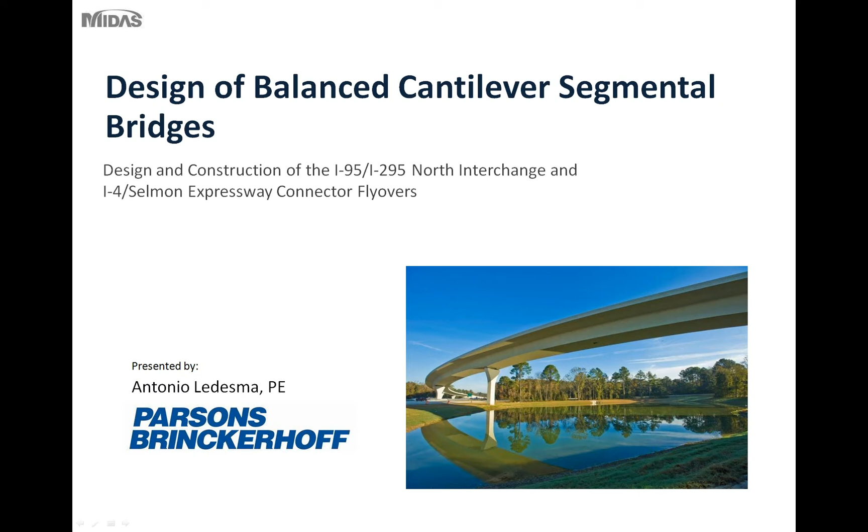Good afternoon, everybody. I hope you can hear me. Thank you for joining us for this presentation on the basic design of balanced cantilever bridges. As Puya mentioned, I'll discuss two projects that I was a design engineer on, and hopefully you'll get a basic understanding of precast balanced cantilever design.

The presentation will discuss some learning objectives, basic balanced cantilever construction, and then I'll go into the two case studies: the I-4 Lee Roy Selmon connector in Tampa, and the I-95, I-295 North Interchange in Jacksonville, Florida. If anybody writes in a question, I'll attempt to answer them.

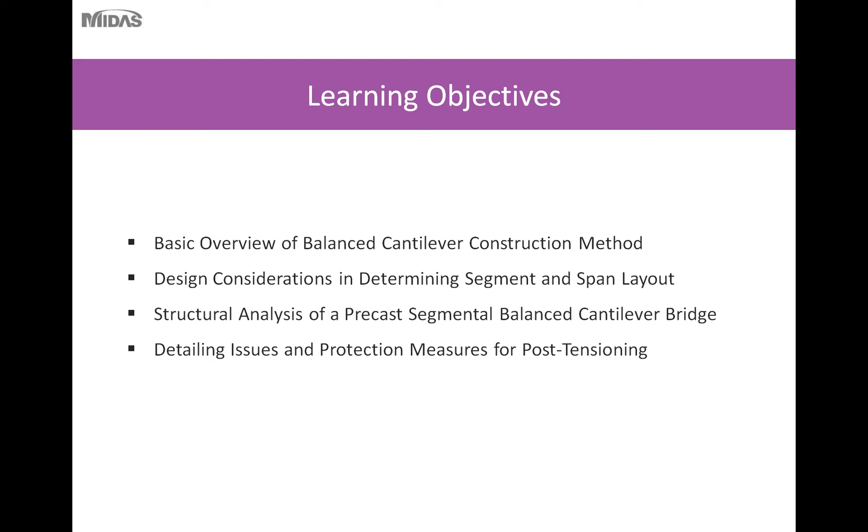So the learning objectives today would be a basic overview of balanced cantilever construction, the balanced cantilever construction method, some basic design considerations in determining the segment layout and span layout of the bridge, a general discussion on the structural analysis of a precast segmental balanced cantilever bridge, and some detailing issues and protection measures for post-tensioning tendons used in Florida.

For balanced cantilever construction, precast balanced cantilever is basically a construction method involving progressively erecting segments on alternating sides of the pier segment. You erect one segment on one side, then transfer to erect another segment on the other side, progressively cantilevering the segments out on alternating sides.

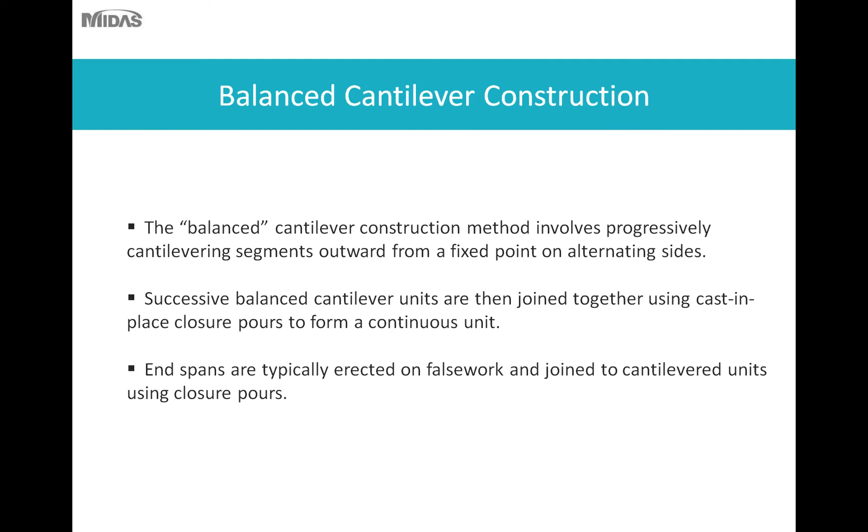Successive balanced cantilever units are then joined together using a cast-in-place closure pour or stitch pour to form continuous units. The end spans, since they don't have a way of balancing on the other side, unless special considerations are made, are generally erected and supported on falsework.

Some advantages of balanced cantilever construction include the ability to construct over traffic, short lead time compared to acquiring and fabricating steel elements, and the use of local labor and materials, since precast segments are usually cast on site or very close by. Local materials and labor are typically used for casting segments, as opposed to shipping in large steel girders or tubs. Balanced cantilever construction can also be erected using trusses to eliminate ground-based, crane-based erection.

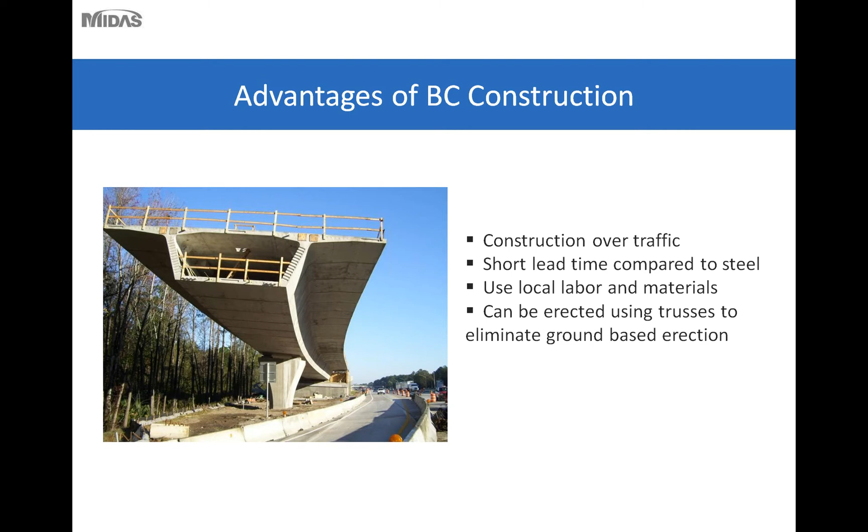So the first project I'll discuss is the I-4 Selmon Expressway interchange. I'll discuss one of the ramps, Ramp C, go through the balanced cantilever construction sequence, and then talk about some unique features of this bridge.

The project is located in Tampa. The horizontal road at the top of the picture is Interstate 4, connecting Tampa to Orlando. The expressway along the bottom is the Selmon Expressway. The DOT proposed to connect these two major thoroughfares with what they call the I-4 Selmon Expressway connector. This project was so large that they split it up into two sections: the north section was designed by Parsons Brinckerhoff, and the south side was designed by a couple of other firms.

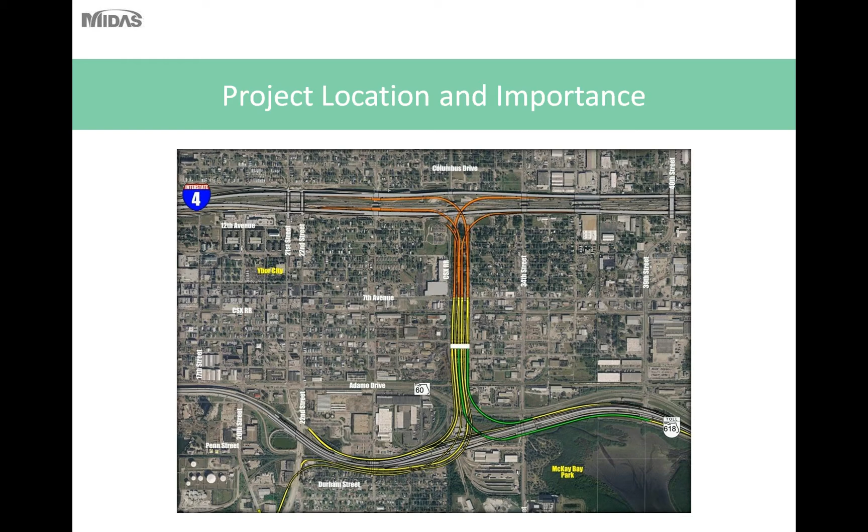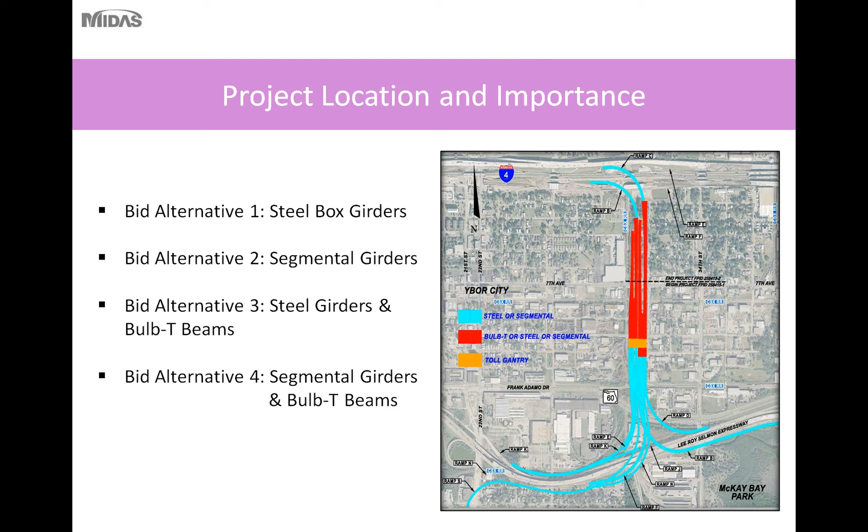So for this project, due to the scale and to promote the most aggressive bidding, 4 alternates were let for the project. Bid alternate 1 consisted of using all steel box girders. Alternate 2 consisted of an all segmental approach with a mix of balanced cantilever and span-by-span construction. Bid alternate 3 included steel girders for the flyovers, and the red section shown in the picture is called the viaduct. The viaduct would be constructed out of bulb T-beams, and the 4th alternative was using segmental bridges for the flyovers and bulb teeth for the viaduct.

So the chosen bid package was a segmental with the Florida bulb T's for the viaduct.

So the bridge I'll be talking about today is the north interchange with the connection to Interstate 4. There are 2 balanced cantilever flyover ramps at this location.

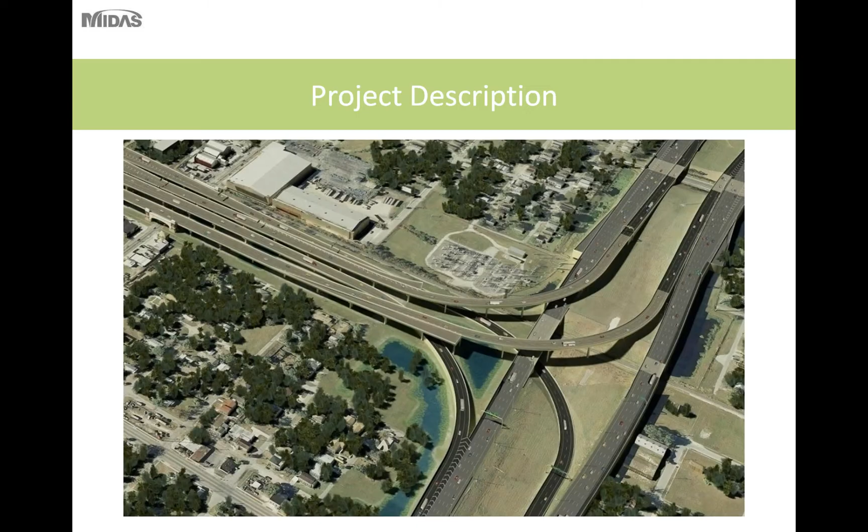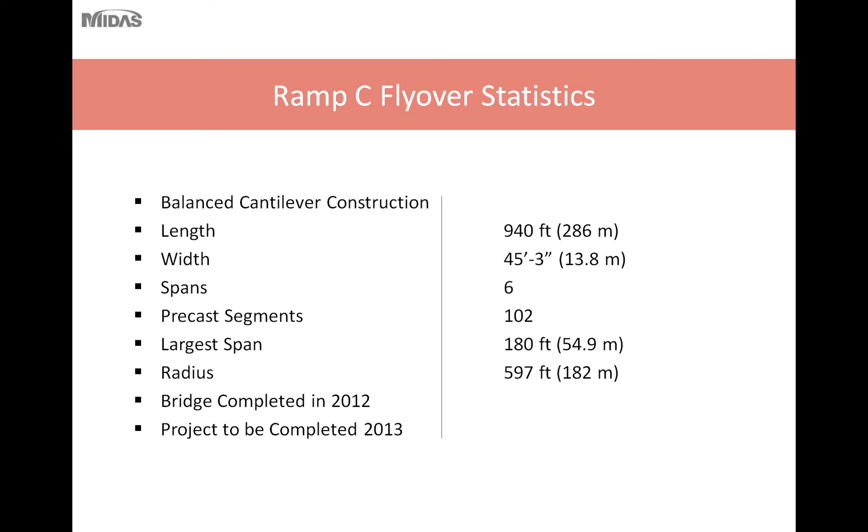Some of the ramp statistics: this bridge was constructed using precast balanced cantilever construction method. The length of the bridge was 940 feet with a width of 45 foot 3 inches to accommodate two travel lanes and shoulders, 6 spans comprised of 102 precast segments. The largest span was 180 feet, and the horizontal curvature of the bridge was approximately 600 feet. The bridge was completed in 2012, and the project overall should be completed roughly maybe summer of next year.

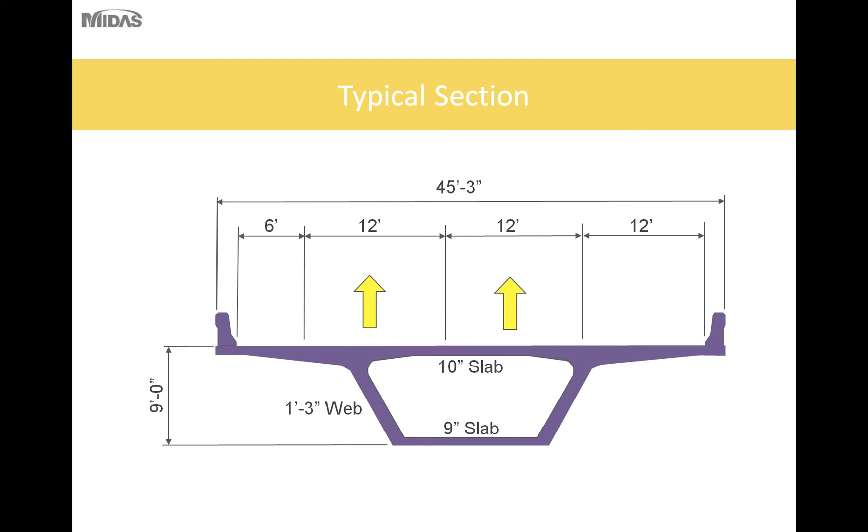Shown here is a typical section showing that the bridge carries 2 lanes of traffic and the shoulders. As you can see, the depth of the girder is 9 feet. The top slab is 10 inches and the bottom slab is 9 inches.

So the pier segments for this bridge are constant depth throughout. The height of the bridge was not increased near the piers, and this was to tie into an existing project, the Selmon Expressway, and keep the box proportions similar. The depth of the structure is 9 feet deep, and the span to depth ratio is 20 for this bridge.

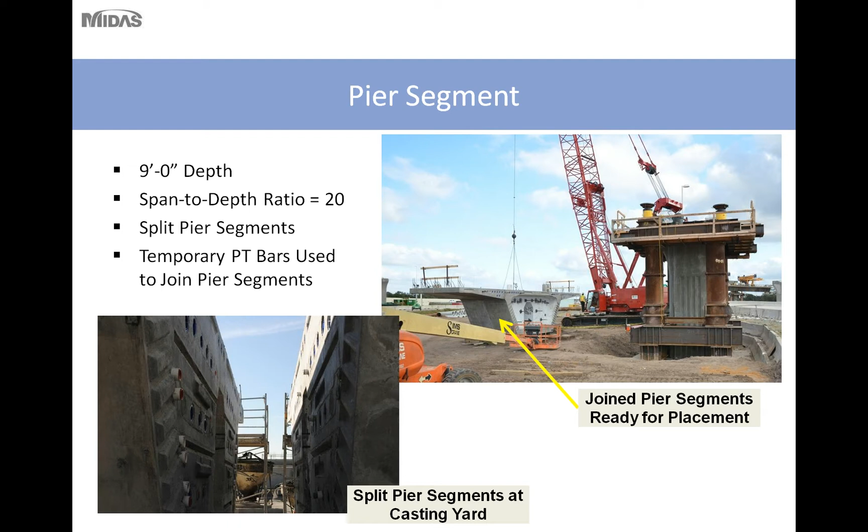The foundation is comprised of 36-inch drilled shafts. We try to use one typical size footing to increase efficiency and limit the number of foundation types. However, there was a special foundation at Pier C4, which we'll discuss in a little bit.

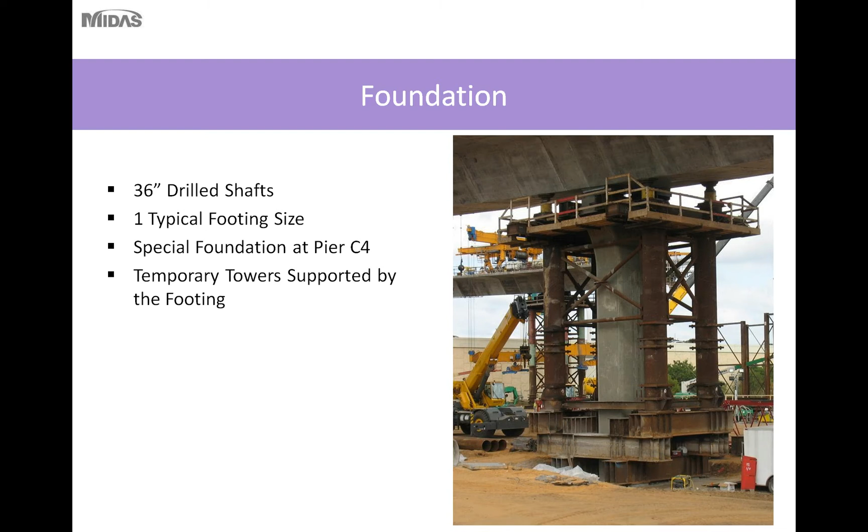So to erect the balanced cantilever construction, we typically use temporary towers supported on the footing. These towers can be supported off the footing on their own foundations, but typically it's easier to support them on the footing if your footing is designed to accommodate the overturning moments on the temporary towers. If not, these towers can be spread out further and supported on temporary footings of their own.

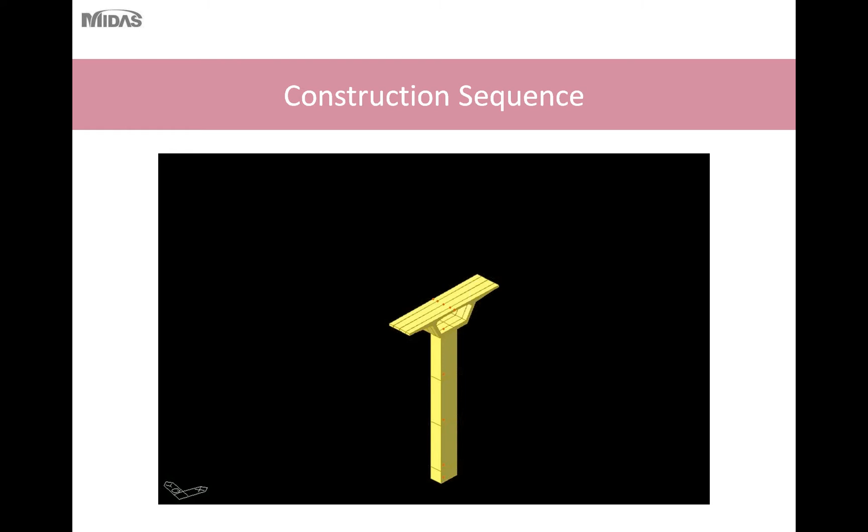So what I would show you here is the basic construction sequence for a balanced cantilever construction using the Midas software. Typically you would use a specialty software like Midas or others to simulate the stage construction of the bridge. Typical software packages don't allow you to have separate models or separate structures not joined together in the same model, so typically you need specialty software to allow unconnected structures and to take into account the time-dependent effects and loading history on the structure.

So here we would typically start by erecting the substructure, the columns, and then erect the pier segments. Successive precast segments are joined to the pier segment on alternating sides and connected using what we call cantilever tendons in the top slab. So as you progress outwards, you install new cantilever tendons of varying lengths.

During this unbalanced phase, what I've shown is two segments erected, but typically you would erect one at a time, join them using temporary erection PT bars, then join the other segment, and connect those two segments with the entire structure using a cantilever tendon.

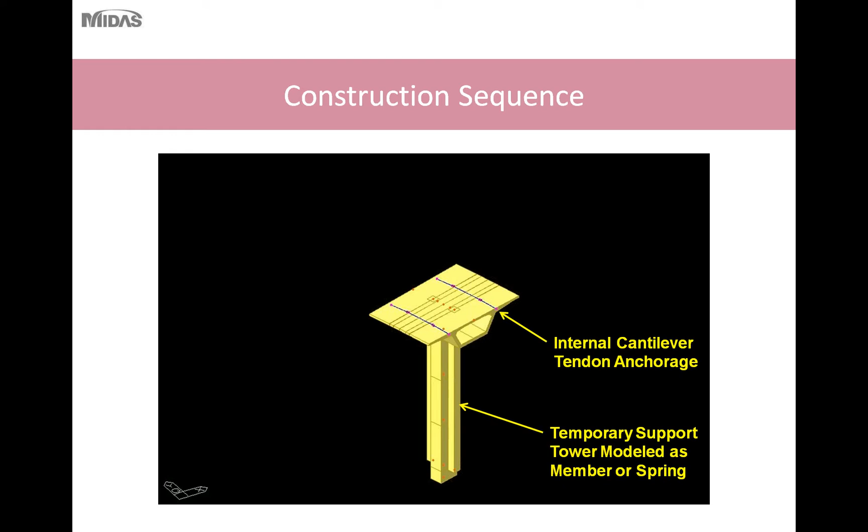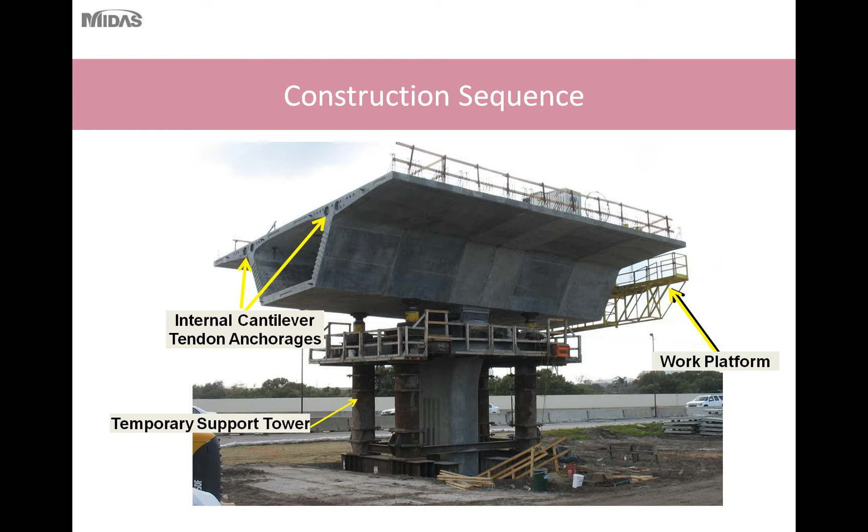The cantilever tendon is located in the top slab, and typically a work platform is installed at the end so that workers can access and stress the tendons during erection.

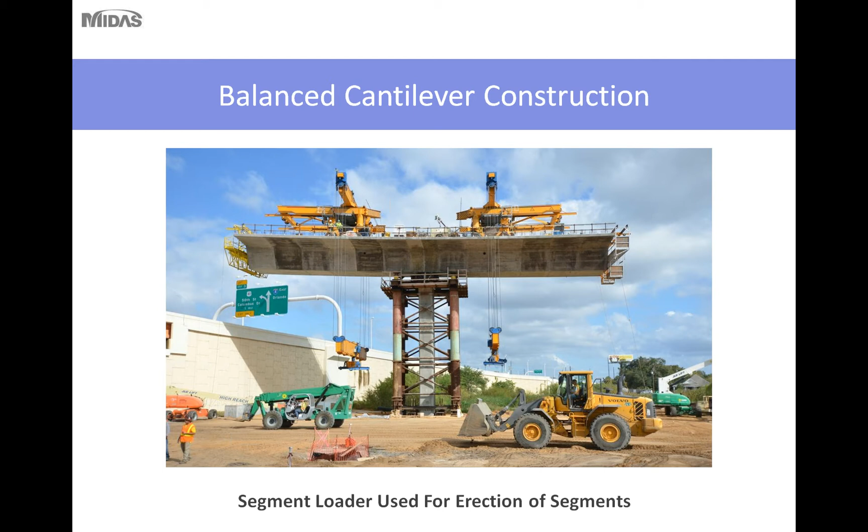This particular bridge, you can erect the segments numerous ways. The most common way is using ground-based cranes. However, for this project, a segment loader was used to erect the segments. The advantages of using a segment loader: if you have very tall piers or you're over terrain where locating ground-based cranes isn't feasible, the use of a segment loader is very beneficial in the sense that you can deliver the segments to the site near the piers in one location. The segment loader can drop down, pick it up, and move it out to the cantilever, which may not be possible using other construction methods.

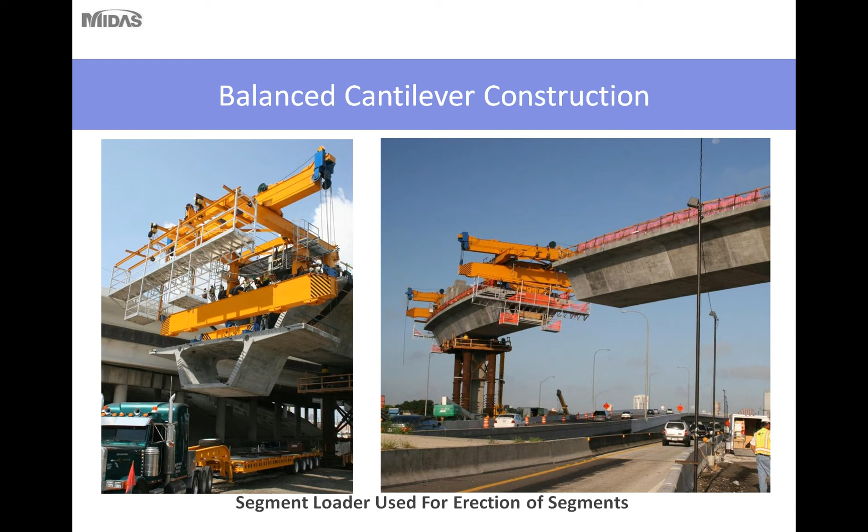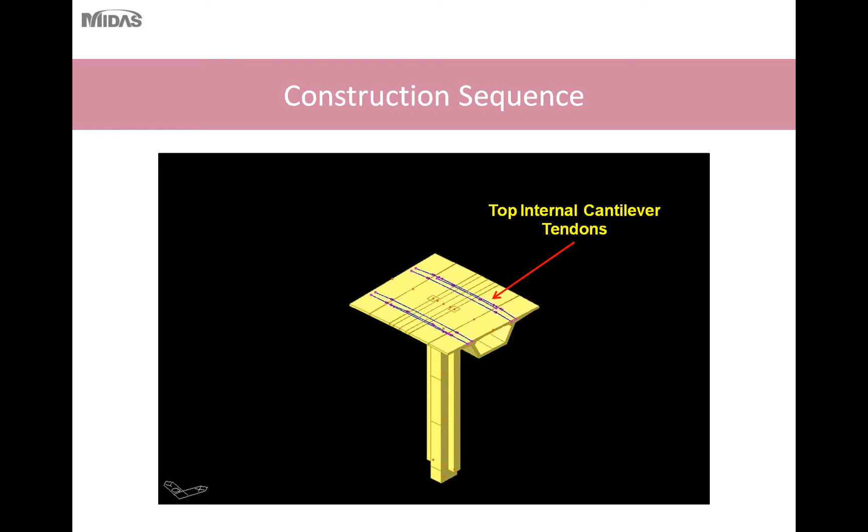The process will continue where you erect segments on alternating sides, and you continue erecting until you finish the balance cantilever unit.

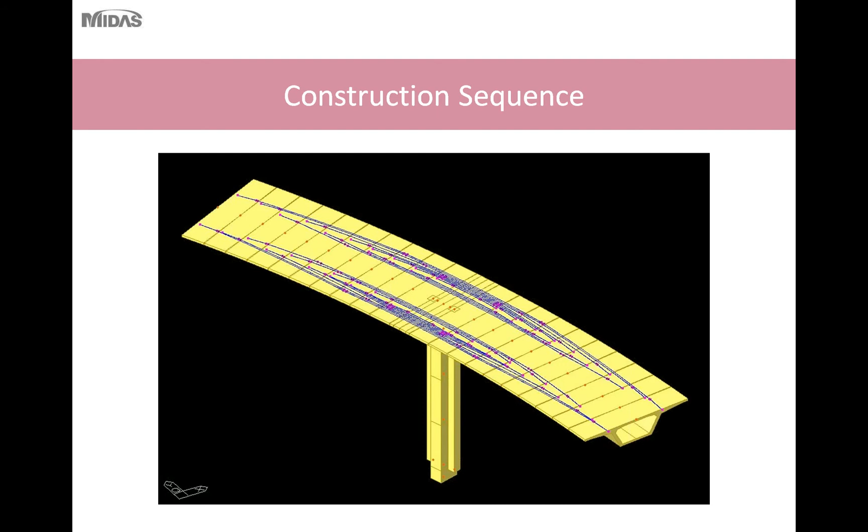Here you can see the finished balance cantilever unit for one pier segment, pier location. Right now, currently all the tendons are in the top slab. There will be some erection PT bars in the top slab and the bottom slab.

As segments are erected, you have to apply an epoxy coating to join the two segments for durability, to prevent water from getting into the segments, and to join the two segments together more effectively.

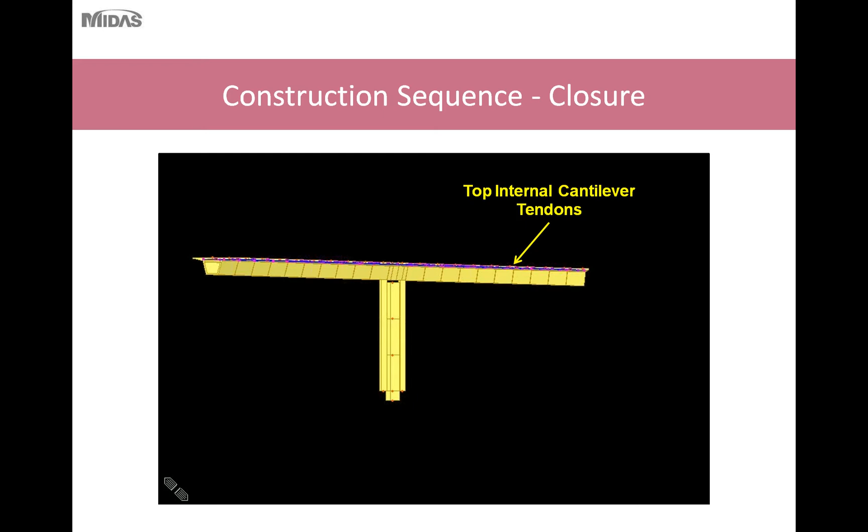After you finish erecting the first balance cantilever unit, the end segment to the abutment, or maybe to another continuous unit, is erected. These end span segments are typically erected on false work.

After the end spans are erected, the unit is made continuous by the use of bottom continuity tendons, which go through the bottom slab and provide positive moment capacity.

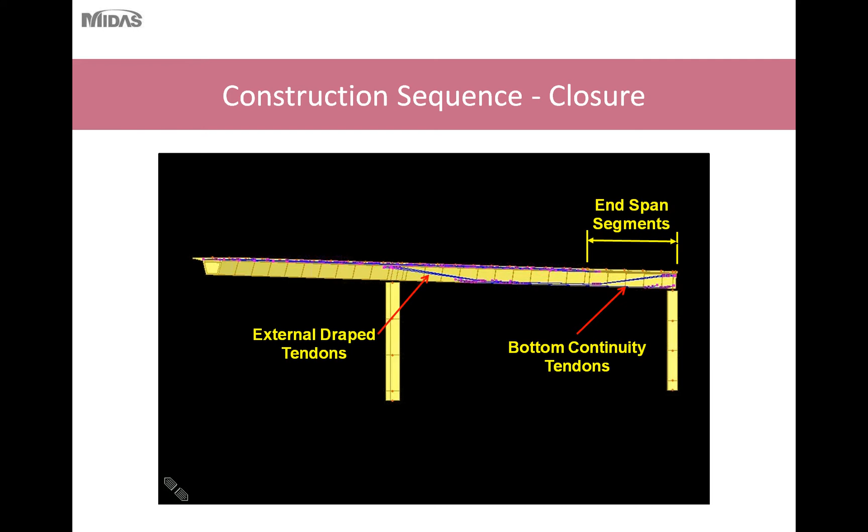Some states require the use of external drape tendons. Not all states do, but external tendons are also used. External tendons are required in Florida, and one benefit is that you get some redundancy. Two, due to the drape nature of the strands of the tendons, you get additional shear capacity, which really helps your shear capacity near your supports.

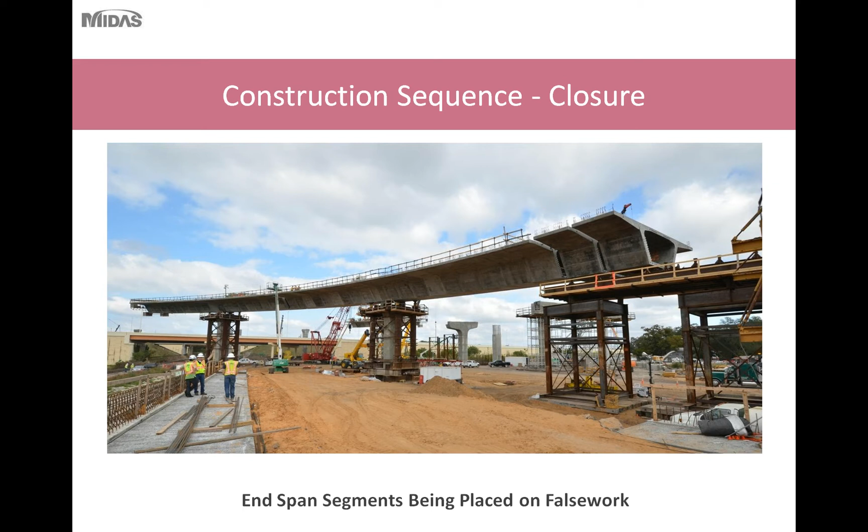After these end span segments are joined together, a cast-in-place closure pour will be constructed between the end span segments and the cantilever segment to make them continuous before stressing the bottom continuity tendons and the draped external tendons. Typically, also not shown in the previous diagram, across this closure pour you would also install top continuity tendons to join the segments.

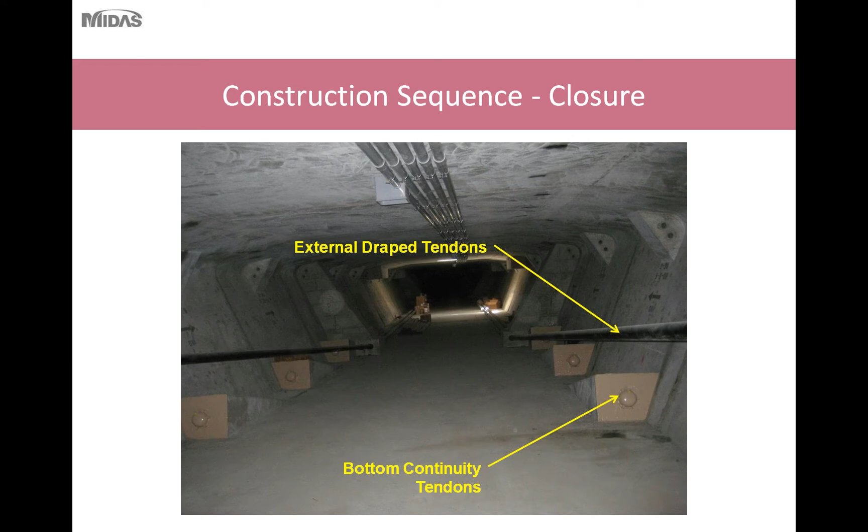Shown here is an inside view of the box girder, showing you the external drape tendons and the bottom continuity tendons. After construction, or after stressing, the bottom continuity tendons are coated with an elastomeric coating to prevent any contaminants from getting into the tendon and into the strands.

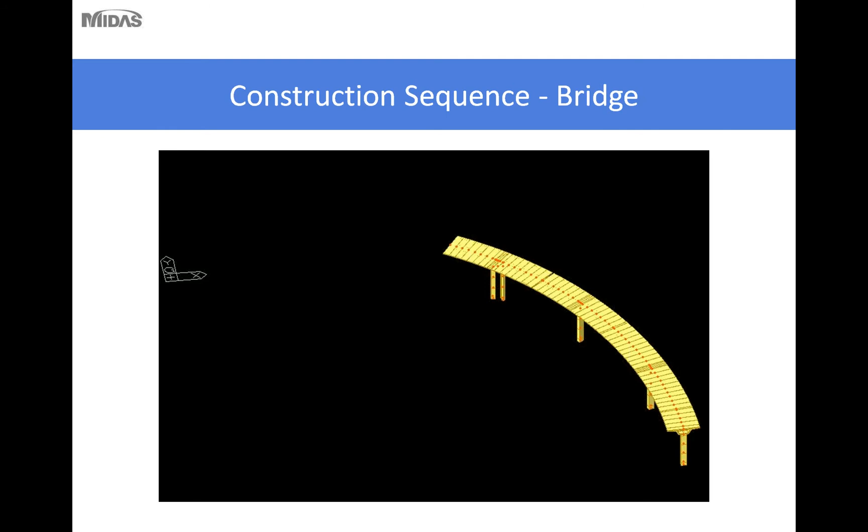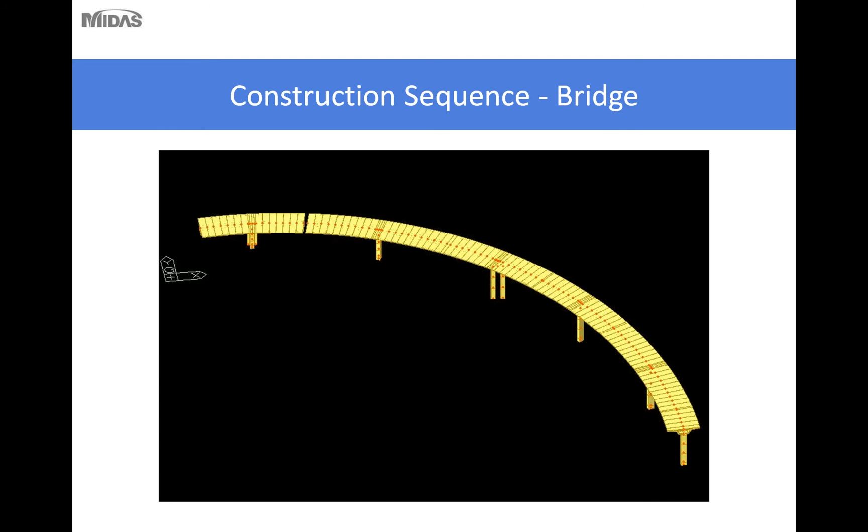Shown here would be an overall view of the construction of the balance cantilever bridge for the entire bridge, starting out with the erection of one cantilever unit joined by the end span. Then successive balance cantilever units are erected and joined to the previous one using cast-in-place closure pours. This process is continued until you get to the end of the bridge and you erect the end span unit on that end.

One of the questions typically is, what's the difference between this method and a traditional method of, say, erecting a bridge on false work, and why you need specialty software to design these types of bridges.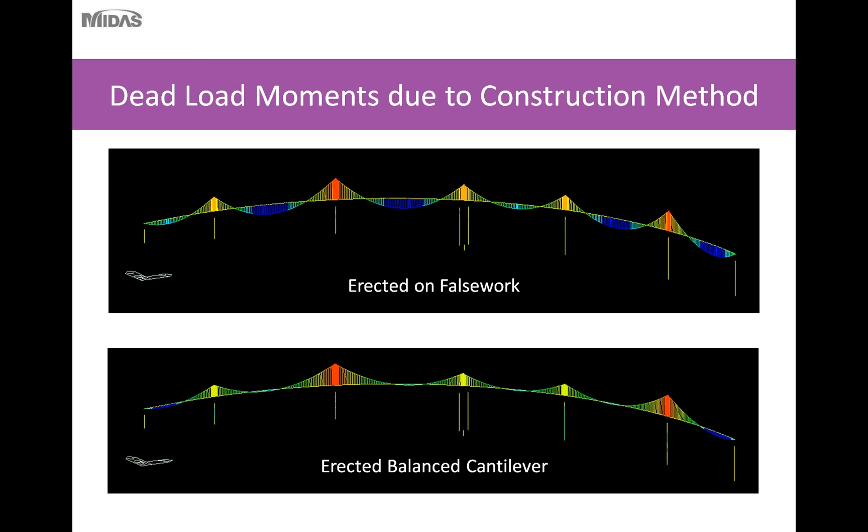However, when you erect a bridge using the balanced cantilever method, because each balanced cantilever unit is isolated during erection, all of your moments are negative moments. The only positive moments you get due to dead load are when you cast the closure pours. So your moment diagram is essentially shifted upwards, so you have very little positive moment and much higher negative moments as compared to if this bridge was erected on false work.

As a designer, you would also be aware that the moments and loads transferred to your substructure would be opposite of what you would expect if you erected a bridge on falsework.

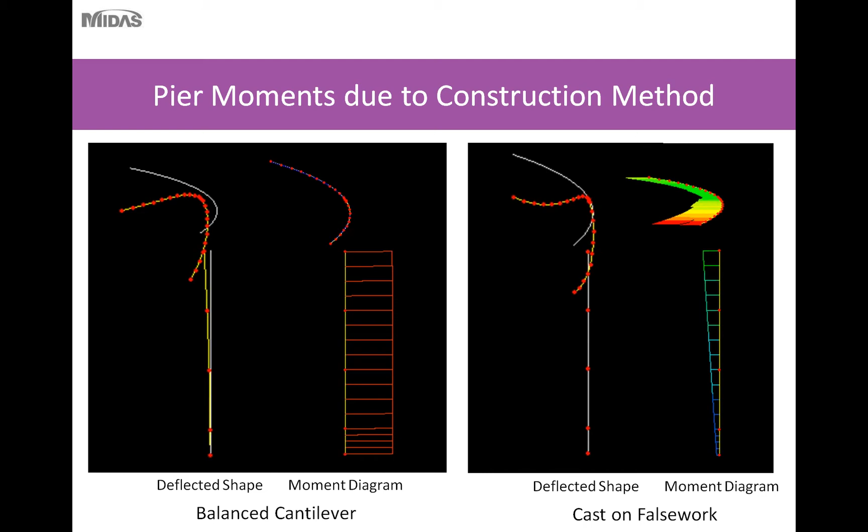The graphic on the right shows the deflected shape and moment diagram if you were to erect this bridge on falsework. If you erect a continuous unit on falsework, the centroid of the span is towards the outside of the curve, so your column moments would be towards the outside. Using the two different methods, your inside and outside bearing moments for maximum dead load would be opposite. But as you join these structures and make them continuous, any loads applied after that would be the same.

Continuing this, for this bridge, Ramp C, there was a unique situation where one of the piers had to be designed to accommodate the future high-speed rail corridor.

The available width of this corridor only allowed a 4-foot diameter, or 4-foot width opening for the columns.

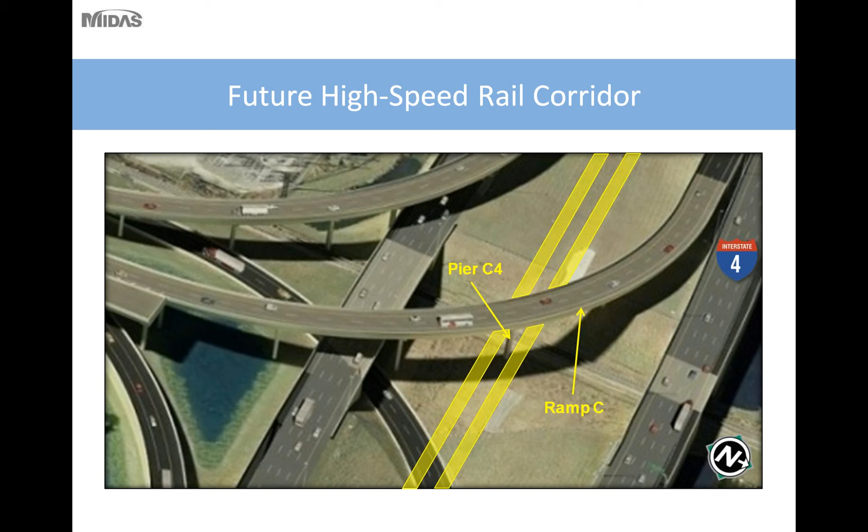To accommodate this, this pier was skewed, and we basically used two columns, 4 feet in width, which ran down the middle of this corridor.

To accommodate the location of the bearings for this column, we couldn't use a typical pier segment. So we split the two precast pier segments and installed a 5-foot width typical segment in between, then came back and filled this precast segment with cast-in-place concrete, so the typical segment acted as a form for the cast-in-place concrete. This pier segment ended up being 17.5 feet in length, as opposed to the 10-foot length of a typical pier segment.

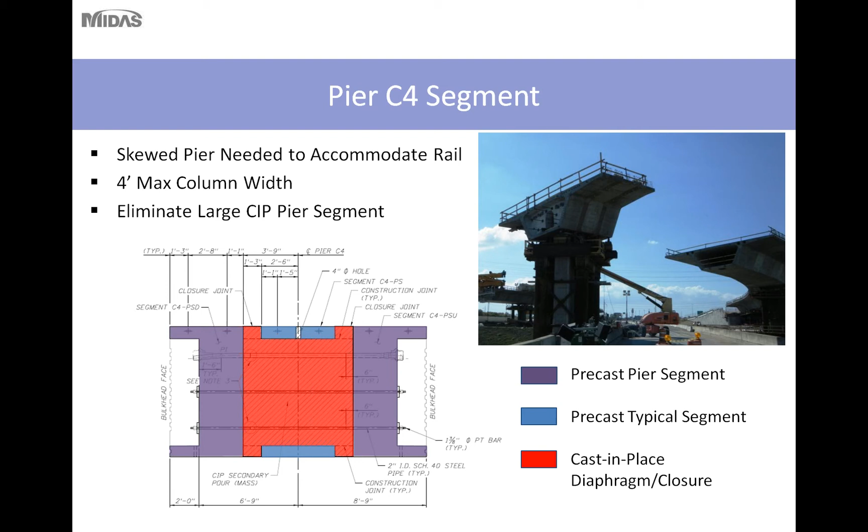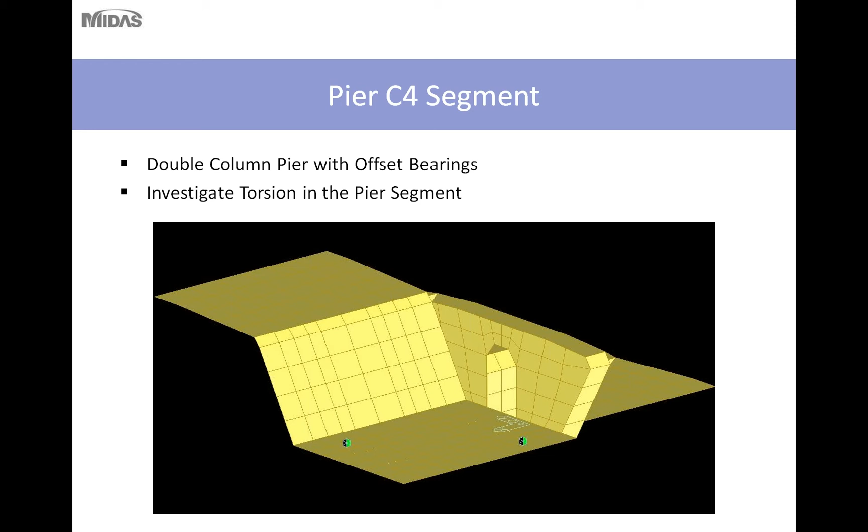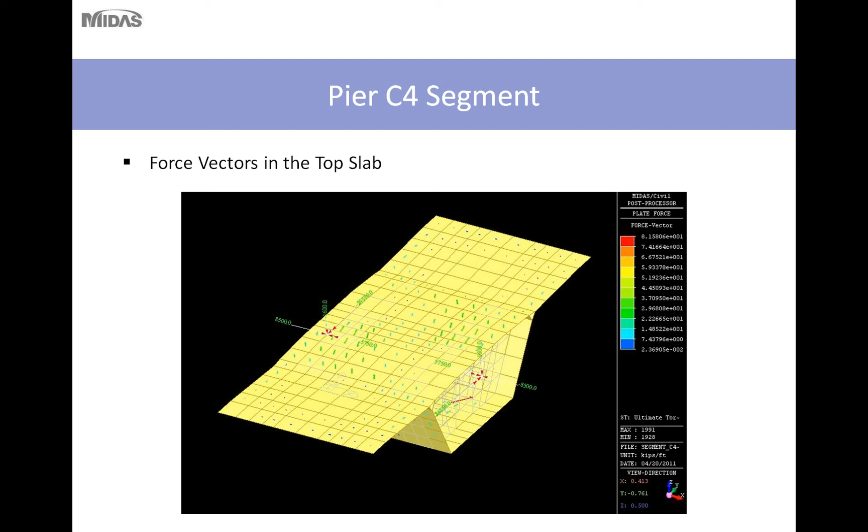With the offset skewed bearing arrangement, we had to make sure this pier segment could accommodate the loading, so we investigated the torsion in the pier segment. Here you can see the shear flow, or force vectors, in the top slab, which we used to design our post-tensioning and the transverse post-tensioning in the top slab of this unit.

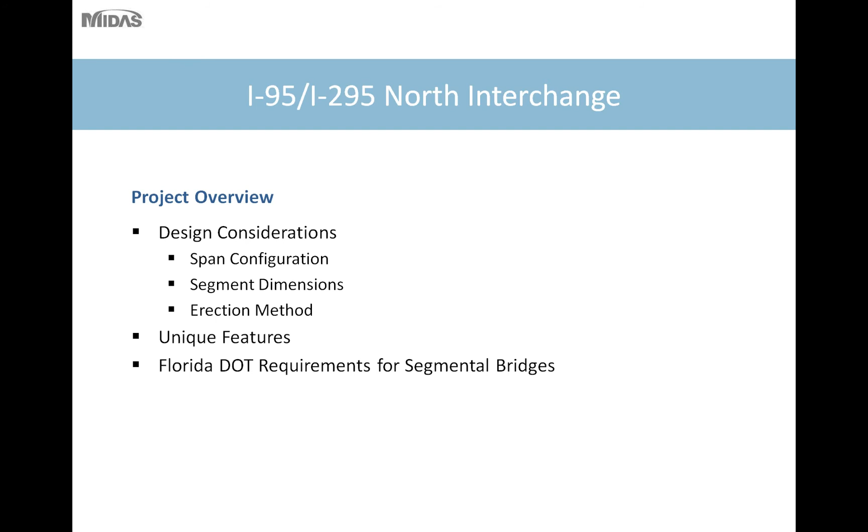The next project I'll discuss is the I-95, I-295 project in Jacksonville, Florida. I'll discuss some design considerations, unique features, and also some of the Florida DOT requirements for segmental bridges regarding post-tensioning requirements and tendon protection measures.

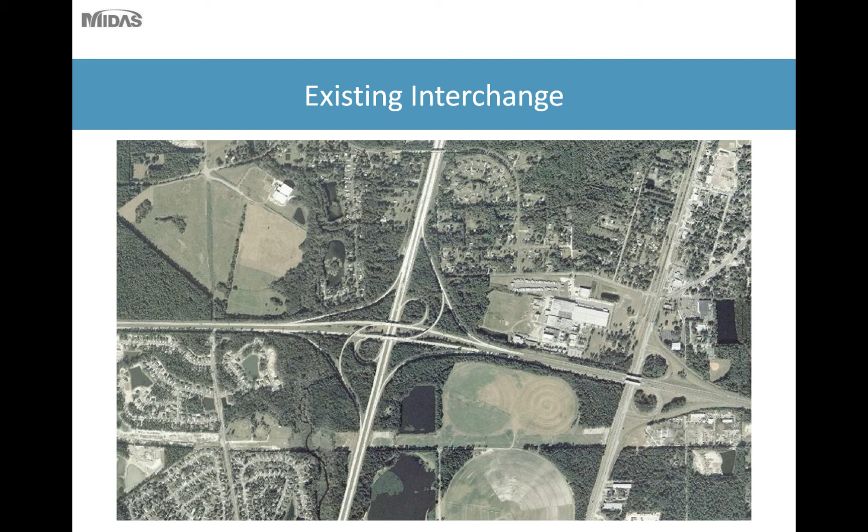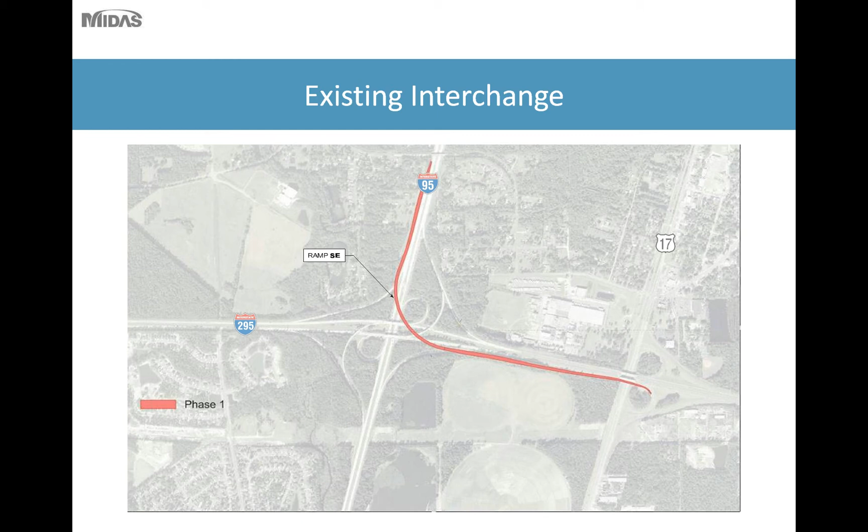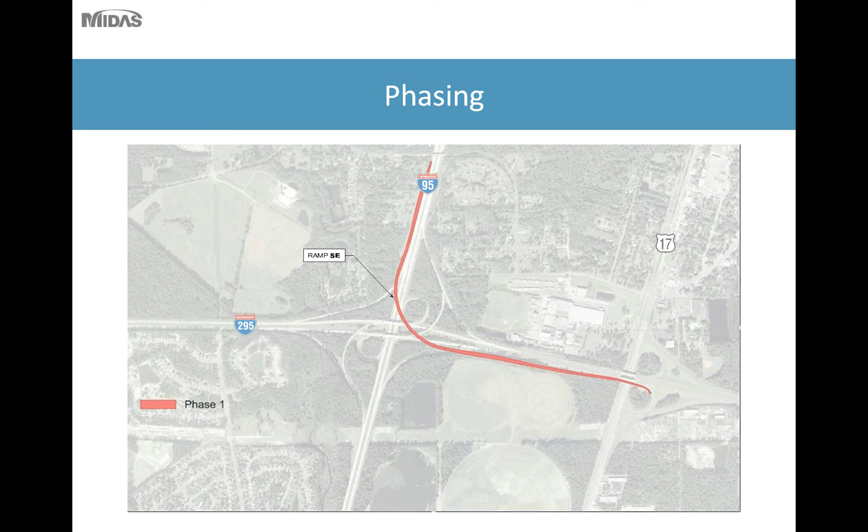The bridge is located at the north interchange of I-95 and I-295. This flyover ramp is located approximately 1.5 miles south of the Jacksonville International Airport. The existing interchange is a partial cloverleaf, and it will be upgraded to an all-leg interchange in the future. Part of the first phasing of this upgrade is this ramp SE, which is the bridge we'll be talking about today. Ramp SE carries traffic from southbound I-95 to eastbound State Road 9A.

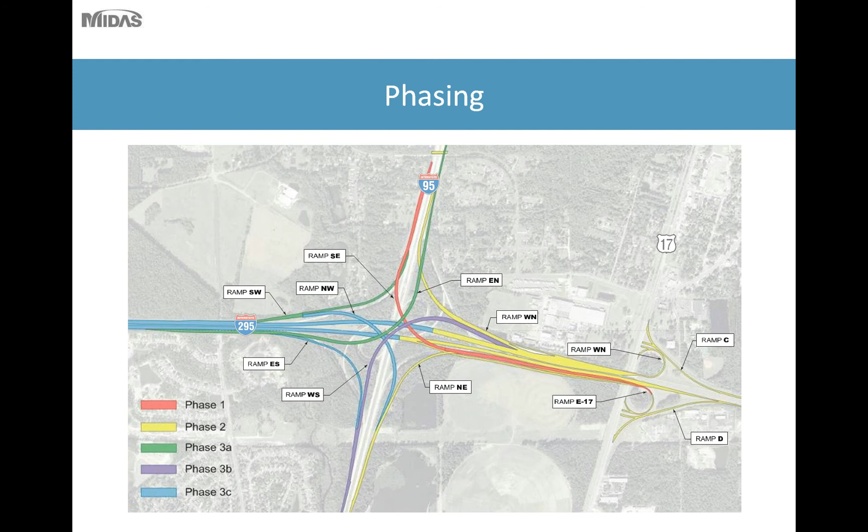Shown here is the all-leg interchange in the future. This interchange would be constructed in multiple phases, 3 phases total, and will potentially be let sometime in the near future. When designing this ramp, the future interchange needs to be considered, so the vertical profile of this ramp needs to be minimized in order to not affect, or to minimize the effect of, the future ramps flying over this one.

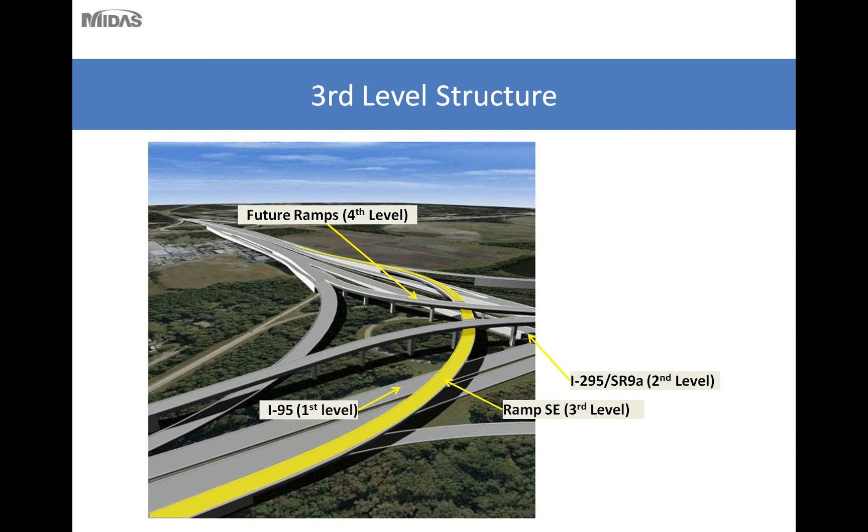Ramp SE is the 3rd level ramp in this interchange upgrade. The ramp will fly over I-95, the 1st level, I-95 southbound and the existing ramps, and the 2nd level being the I-295/State Road 9A level, with Ramp SE's 3rd level. Future ramps will comprise the 4th level.

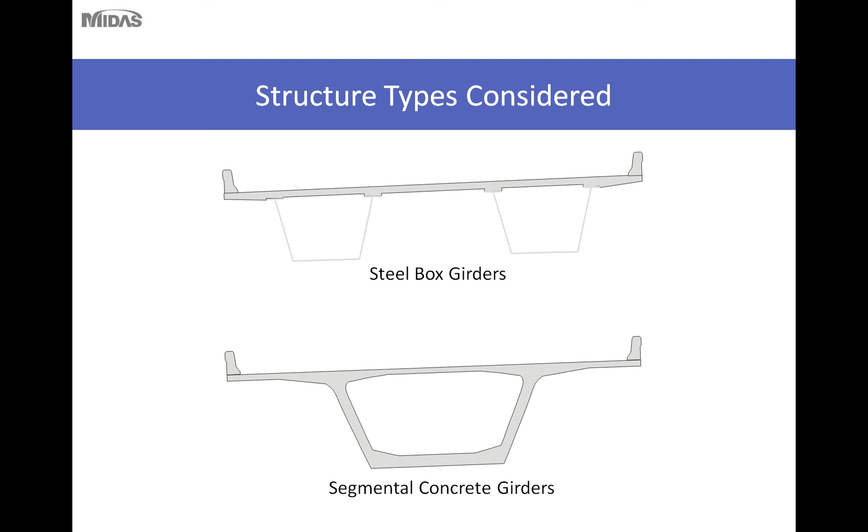Two main structure types were identified as leading candidates for this bridge: steel box girders and segmental box girders. The segmental box girders were chosen based on the bridge type study and estimated construction cost.

The length of this bridge is a little over 2,200 feet, with a width of 49 feet 3 inches, 10 spans, and comprised of 234 segments.

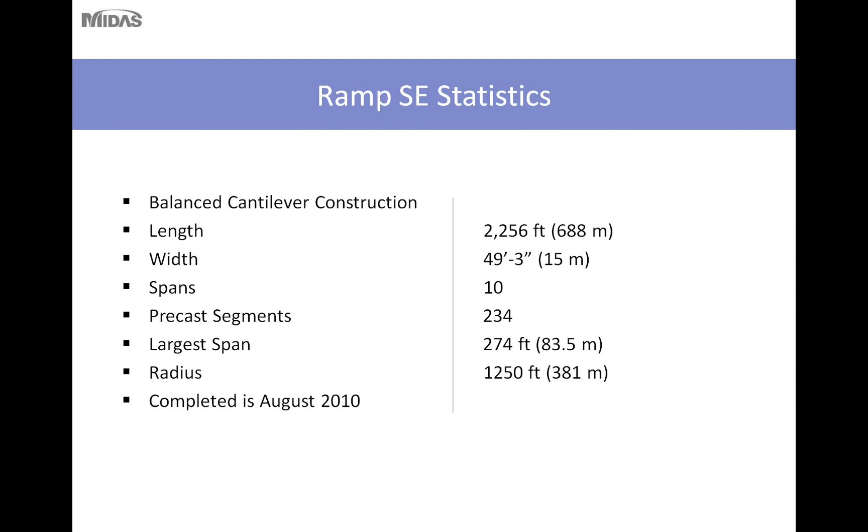It's typically unique to have a precast segmental bridge cost-effective with this few segments. Typically, precast segmental bridges are most cost-efficient when there are numerous segments, giving some economy in segment casting and fabrication, or as part of large projects or long spans where precast segments are more beneficial. The largest span on this bridge was 274 feet, and the horizontal curve on this bridge was 1,250 feet.

Typically, span arrangement for any type of ramp flyover is dictated by what's underneath, and this bridge is no different. Column locations are limited, so sometimes it can be difficult to optimize a segment layout while accommodating efficiency and avoiding existing roads underneath. So if designing a precast segmental bridge, repetition of span, repetition of segment layout, and segment lengths is crucial in order to have a cost-effective structure.

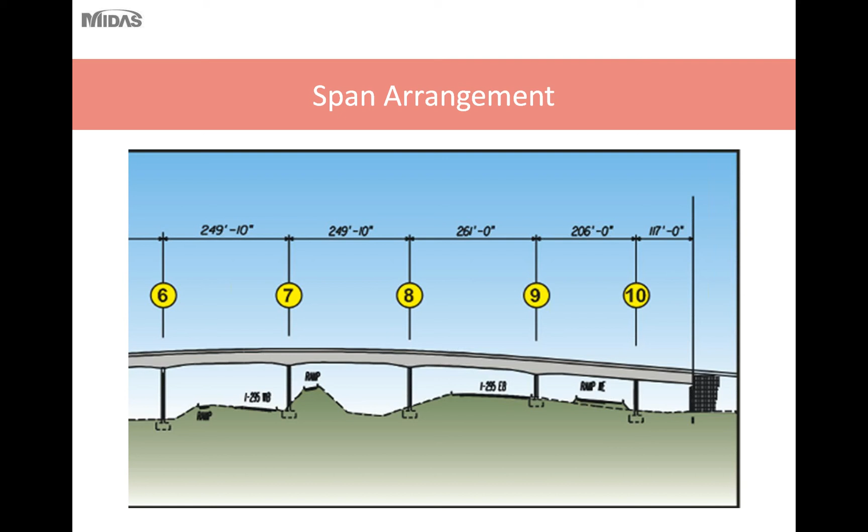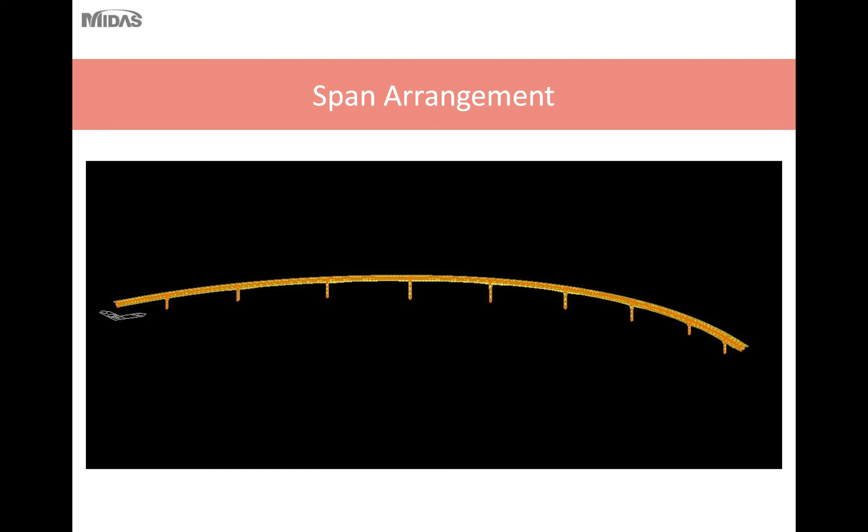Here you can see the 10-span unit and the number of roads that it has to cover or span. Shown here is the 10-span bridge modeled in Midas. But due to the span length of this bridge, 274 feet, the segments are variable depth. The segment depth varies from 9.5 feet at midspan to 12 feet at the piers.

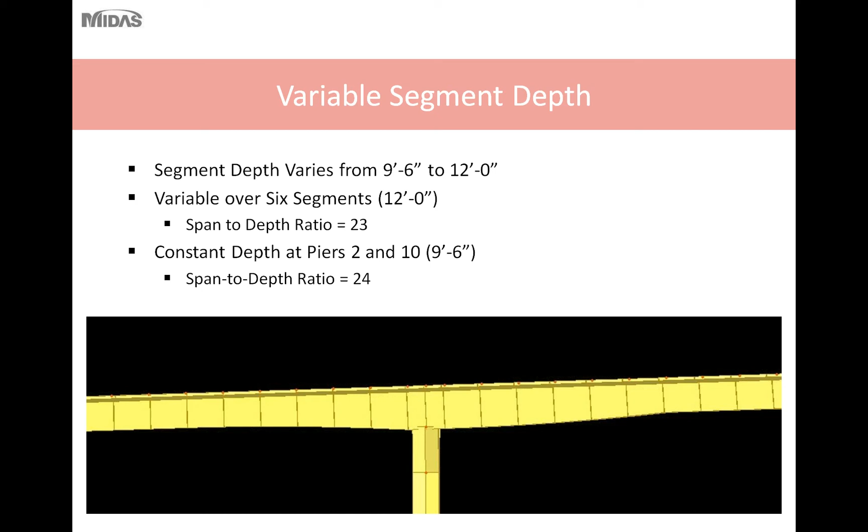This 12-foot variable segment depth is varied over the 6 segments adjacent to the piers. So for the 274-foot span, the span to depth ratio is 23. At the end pier locations, piers 2 and 10, the structure depth was kept constant due to the smaller spans at the end spans. So the controlling span to depth ratio for these 2 pier units was 24.

This bridge was erected using a ground-based crane. The contractor was able to place the crane close enough to the superstructure to accommodate erection of all of the segments, so the use of an overhead gantry or segment loaders was not necessary for this bridge.

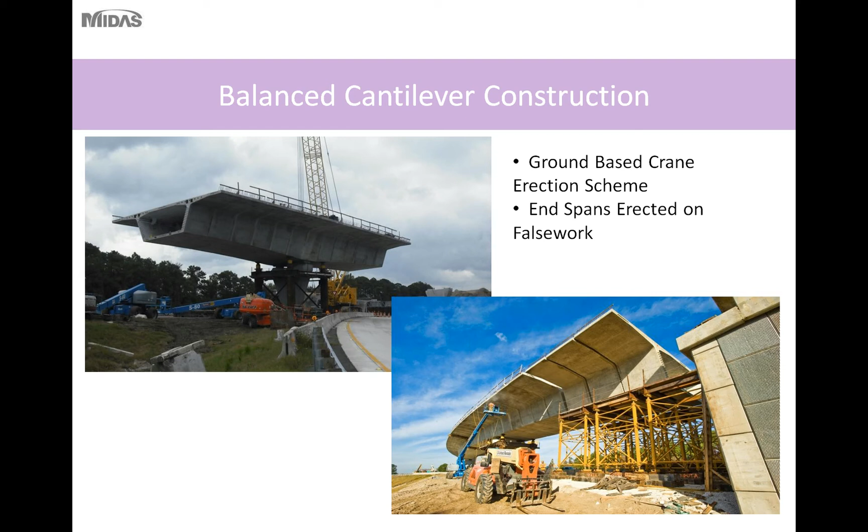Here you can see one of the precast cantilever segments being erected, and in the bottom picture, the end span unit on falsework being erected prior to the closure.

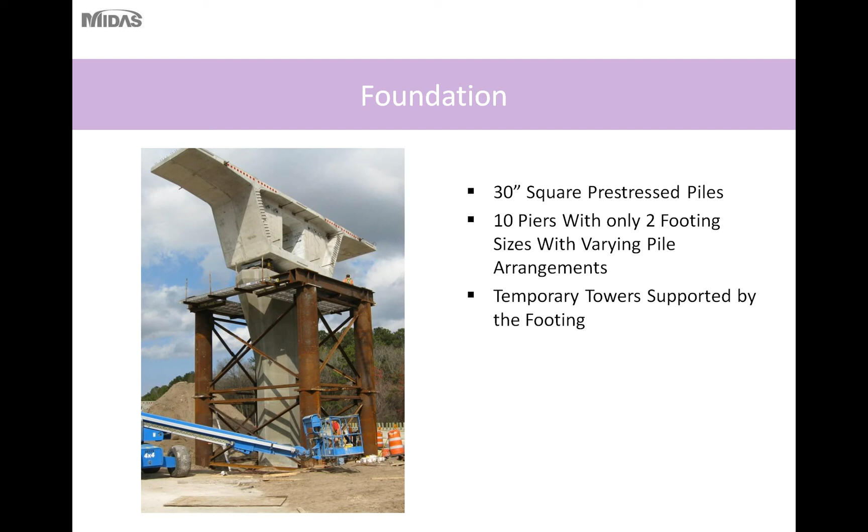The foundations for this bridge used 30-inch square prestressed piles, and out of the 10 piers, only 2 footing sizes were required. As mentioned before, footing sizes and foundation types are typically minimized to increase efficiency and make construction easier. The temporary towers were supported on the footings, eliminating the need for special footings or separate independent foundations for the towers.

The typical segment for this structure was 9.5 feet. Temporary PT erection blisters in the top slab were used because the erection PT bars were external. At the end of construction of one cantilever unit, the PT bars could be de-stressed and reused on the successive balanced cantilever units.

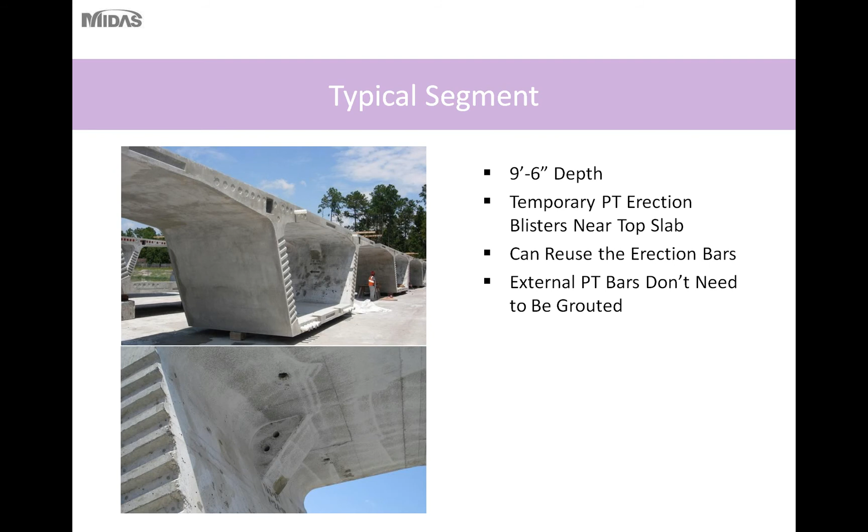One of the benefits of using external PT bars is that since they will be taken off and reused, you don't have to grout them in place. If you locate your erection PT bars in the slabs and they remain permanent, you would have to grout those. So when possible, this can provide some savings and convenience to the contractor.

In the bottom slab, a mix of external and internal PT bars were used. The external PT bars were used in the bottom slab near the pier cantilevers due to the varying depth. Because of the varying depth, there's a radial component to the PT bars, as two PT bars connected in the segment create a radial force that could potentially lead to a spall in the bottom slab.

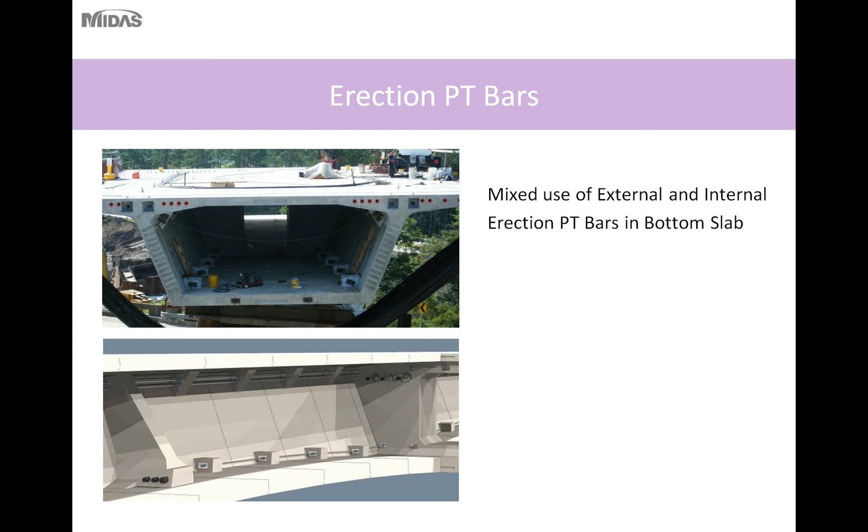In order to mitigate this, these PT bars were external. As we got to the constant depth sections, the PT bars were made internal, where they would not potentially cause spalls. Another reason bottom slab erection PT bars are typically internal is that if external, they could interfere with the bottom slab continuity tendons. So in order to move them out of the way and not interfere with the deviators, external tendons, and the continuity tendon blisters, they're typically made internal.

Here you can see the transition between the external PT bars and the internal PT bars, with an overlap so that you get a constant compression force in the bottom slab.

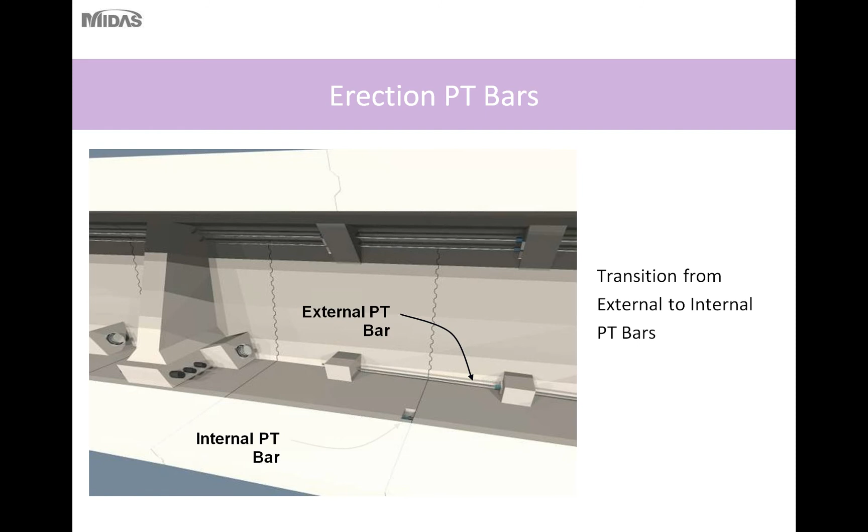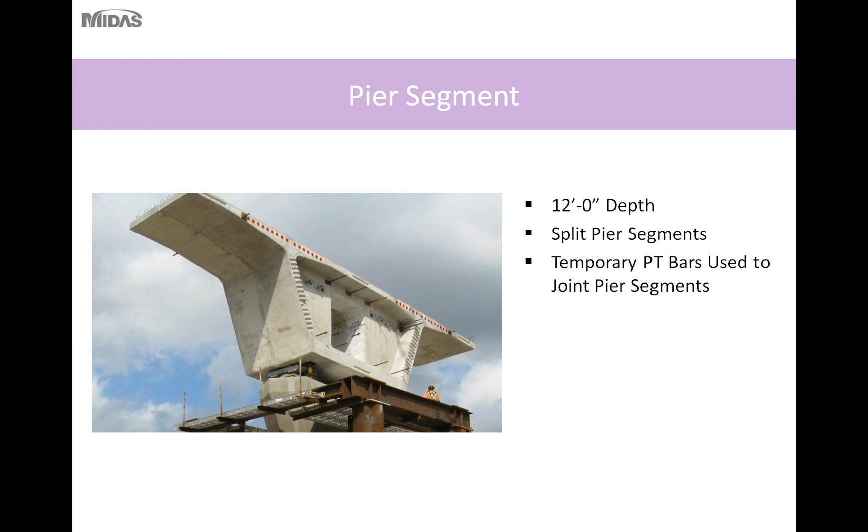Here is the 12-foot deep pier segment. These pier segments were also split pier segments, erected by the contractor on the ground and lifted into place. An additional benefit of splitting the pier segments is transportation: a narrower width segment. Also, because the diaphragms are typically solid with an opening for access, the segments are fairly heavy, so splitting also reduces the transportation weight.

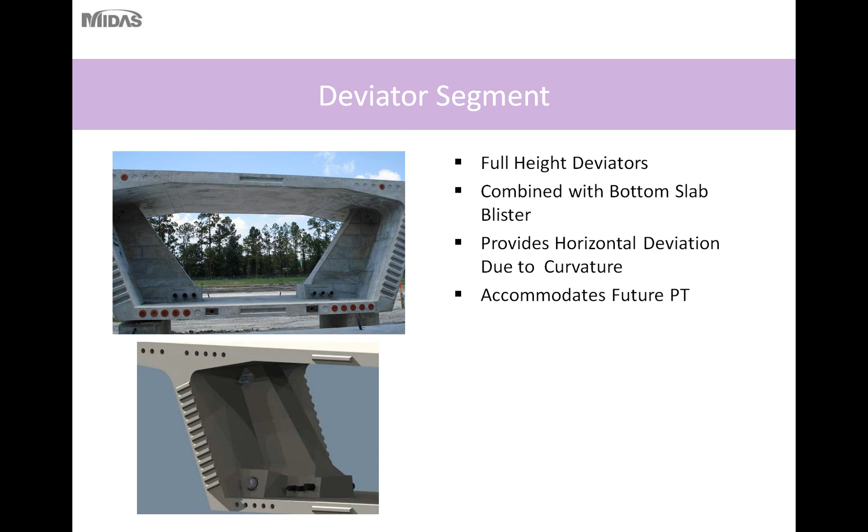And they also provide horizontal deviation, since this bridge is on a 90-degree curve. The deviators basically will enable keeping the post-tensioning far enough away from the inside web to not create a conflict with the tendon hitting the inside web of the girder.

So some Florida DOT minimum tendon requirements. Florida has their own unique tendon requirements for balanced cantilever or segmental bridges. These requirements are not used everywhere. Every state is different, but Florida DOT has some additional ones to enhance the redundancy of the bridges.

So at mid-span closures, we're required to have 2 bottom slab tendons per web and 1 top slab continuity tendon per web. End-span units must have a minimum of 3 tendons per web, and they also must have 2 externally draped tendons per web.

These measures are to promote tendon redundancy, structural redundancy, and provide protection, which are vital to long-term durability of the structure. There have been some very well-documented cases of tendon corrosion in Florida DOT bridges. So these measures are there and in place to ensure durable structures.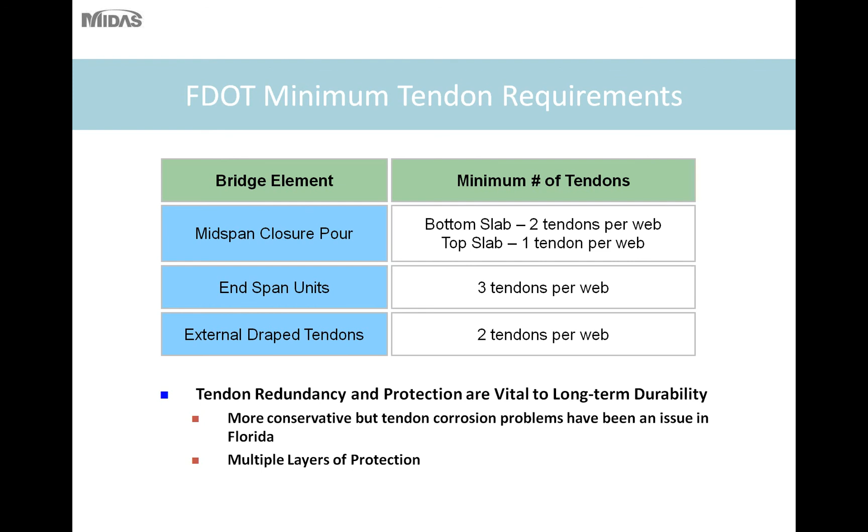So an additional Florida DOT requirement is to have tendon duct couplers. These couplers must be continuous through the precast segment joint. The old method of balanced cantilever construction or precast segment construction involved the use of maybe a neoprene seal between the segments. However, with that method, a lot of times during the grouting of one tendon, you would have some crossover or some grout leakage from one tendon going through a crack and penetrating another adjacent tendon duct, basically clogging up that tendon duct.

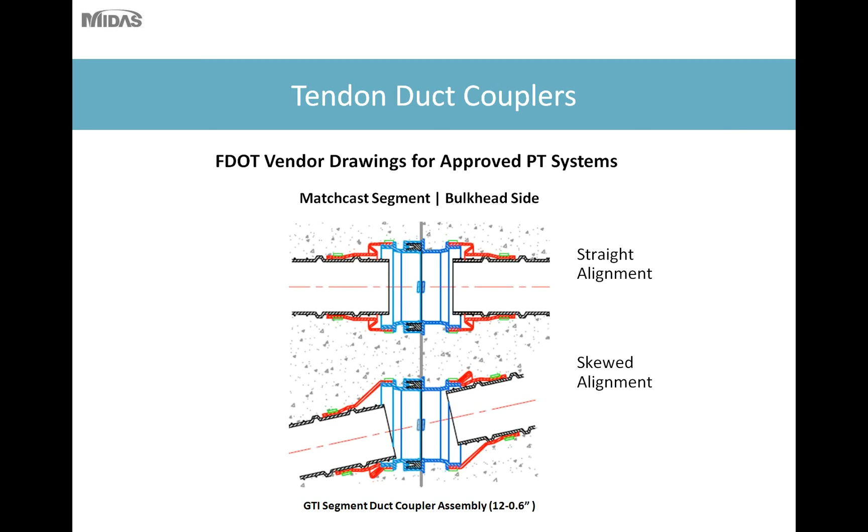So what these tendon duct couplers allow is basically more isolation between the two tendons to form a continuous duct to prevent grout crossover to adjacent tendons. And these tendon duct couplers must be able to accommodate straight tendons and a skewed tendon alignment of up to, I believe, 6 degrees.

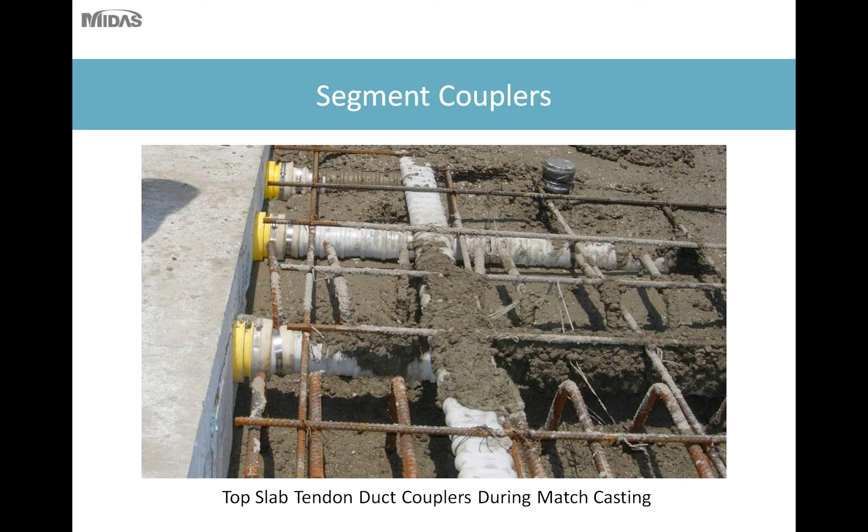So here you can see the tendon duct couplers in place during match casting. As you can see, the segment on the left is a precast segment. In order to assure a good matchup, the forms for the precast segments are basically held adjacent to the existing precast segment, or the previous segment, and the concrete is cast against that to perform a tight seal between the two segments when they will be erected in the future.

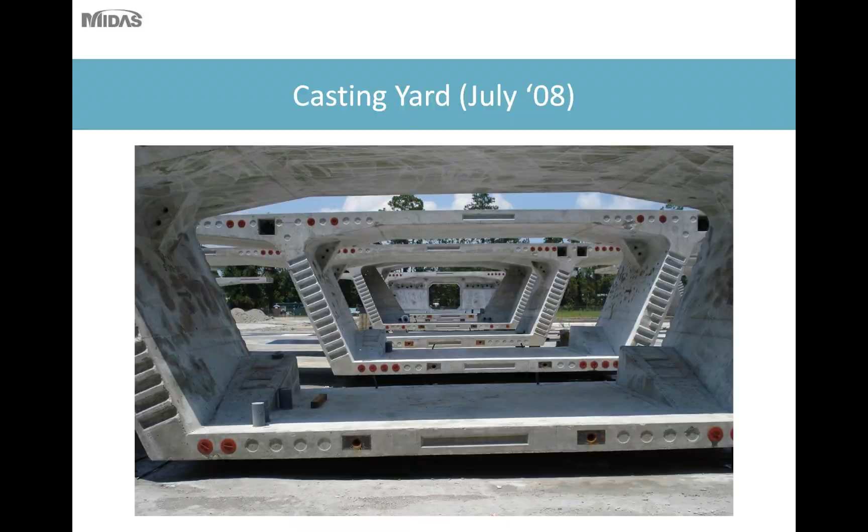So here's just a picture of the many segments in the casting yard.

And that concludes my presentation. Hopefully it gave everyone a basic understanding of balanced cantilever construction and just a very few of the issues that must be addressed as a designer of a balanced cantilever bridge. And if there's any questions, feel free to let me know or type them into the chat pod, and I'll attempt to answer them.

Thank you, Tony, for such an informative presentation.